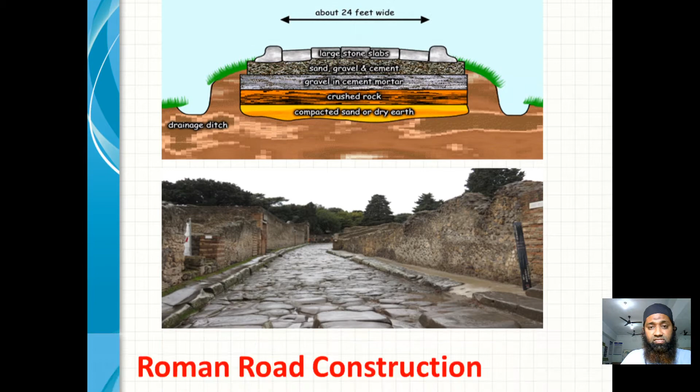The first point, you can see at the bottom of the trench, the Romans put a big layer of stones. The Romans were very good in development, so what made them develop so fast? What was the reason behind their development? You can see here how much importance they gave to their roads. At the bottom of the trench, the Romans put big layers of stones.

This is the subgrade soil where these stones have been placed, and then the broken stones, pebbles, cement and sand are placed there to fill up the voids which have been formed because of the big stones. You can see some spaces have been formed, and those spaces can be filled by these broken stones.

After the second layer has been placed, you can see the third layer, cement mixed with broken tiles. Basically, after the big stones, then the smaller stones, and after that cement is mixed with broken tiles, so even those voids can be filled up. And then you can see the paving stones found at the surface of the roads. After the voids have been filled, the last layer, the surface of the road, has been placed.

So basically, why we want to avoid the gaps or voids is, if we don't fill these voids, at later stages when there is huge traffic, because of the loads of the vehicles passing on these roads, there are high chances of big deterioration of the road. This takes place because of bad filling of the bottom layers of the roads. If they have not been placed properly, this might happen in the future.

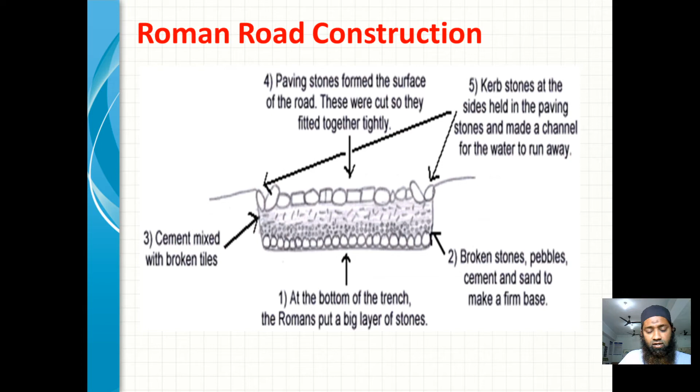Then you can see the fifth point here, the curb stones at the sides hold in the paving stones. Basically, these curbs are placed so that the passenger doesn't deviate. Even if the passenger moves away from the path and comes to the corner, he shouldn't slide down. So these curbs act as a barrier so that the commuter doesn't slide downwards. So these are placed at the corner.

Next, let us look at the ancient Greek roads, how they were placed. As you can see, huge stones are being placed, and within those stones you can see the mud lying there. So basically, mortar was placed so that these stones shouldn't move.

When vehicles move over them, they shouldn't move away, because they might result in problems to the passengers and the vehicle as well. So a number of layers are placed, and then the huge stones.

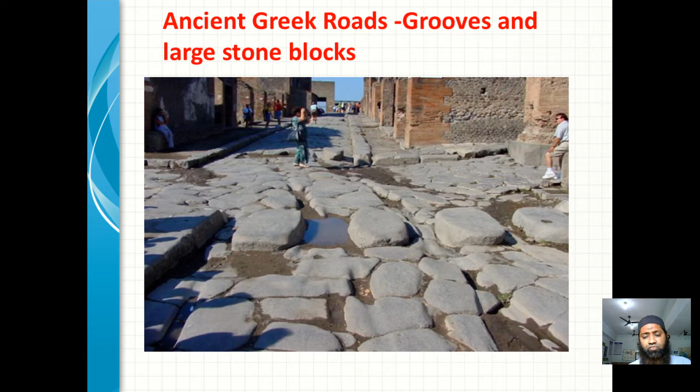See, a very big, important factor in placing a road is also what resources are available with you. You might think, why have they not placed bitumen? One thing might be that it was not available at their place, and the next thing might be they had not researched it, or they had not got that idea, because many things have been coming up with time, with the resources and with the research taking place.

Let us see what has happened in the plank road. You might be surprised, plank roads were also placed during those times. You can see the plank roads were typically constructed of wood planks, 2 inches thick. They were so thick, 2 inches thick. You can just imagine, and 8 feet long, which were nailed to the 4-inch square stringers, basically at a 90-degree angle.

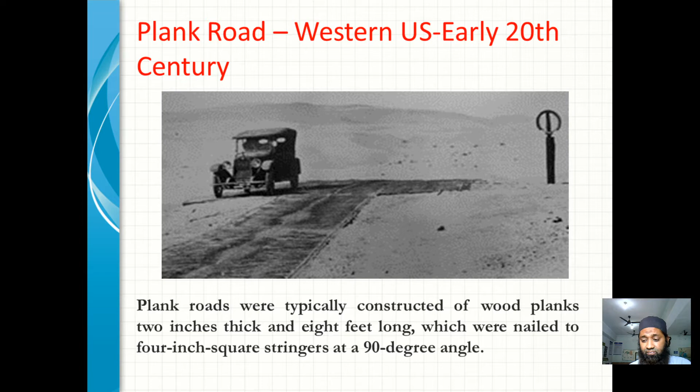Stringers are a material placed at the corners of the road, so that these planks can hold on to them. They can fix onto them, and then they are fixed directly onto the ground. These were placed in the early 20th century, Western US. Okay, you can see all these different types of roads which were laid during those times with the available materials in their place. But still, a high importance was given to the roads.

Let's see the development of roads in India. Roads in ancient India: the excavations of Mohenjo-daro and the Harappa Valley have shown us the existence of roads 2500 to 3000 years BC. So roads existed, and at that time also you can see the earthen roads which were being placed, that far back.

And Kautilya, the first Prime Minister of Chandragupta Maurya, had laid down rules in the Artha Shastra. You can just imagine that this is their scripture, and in their scripture, rules of roads, the type of road, the different types of layers to be placed, the density of the road, all this has been mentioned in their books. So just imagine how much importance they gave to road development at those times as well.

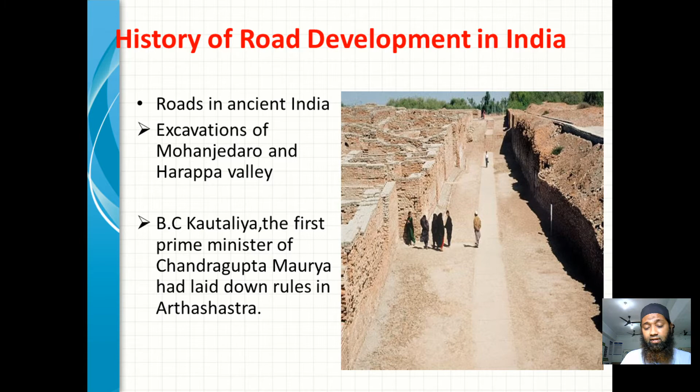Because a good road network plays a very big role in the development of the country. If your road network is good, from the ports and coastal areas to the business centers, from the business centers to the ports, and connecting the whole country, if mobility is very easy, then the defense system will also be very strong in that country. Okay, let's see the next.

Now, what happened during the Mughal period? The Mughals also came up with very big connecting roads from the northwest to the eastern areas of the Gangetic Plains. As you can see there, the road network, the Grand Trunk Road, which was placed in northern India in 1857, from Peshawar to Bombay, and then to Kolkata. Basically, before independence, India and Pakistan were together. So the Mughals placed such good roads, connecting from Peshawar to Bombay.

Now, why Bombay? Because these were port areas. Bombay as well as Calcutta were port areas. So big trunk roads were placed during that time, because, as I told you earlier, good connectivity leads to economic development, and it even boosts a good defense system.

Now, in the 19th century, when the Britishers invaded here, some of the trunk roads were already placed. The Britishers came up with new trunk roads as well. Many trunk roads were metalled and bridges were provided where the needs were there. In 1865, Lord Dalhousie formed the Public Works Department, a specific department to look into matters related to roads.

But still, due to different developments taking place at that time because of the independence movement, the roads built by the Mughals were not given that importance due to all these hardships, and the maintenance was not proper, and because of that the roads deteriorated during the British time.

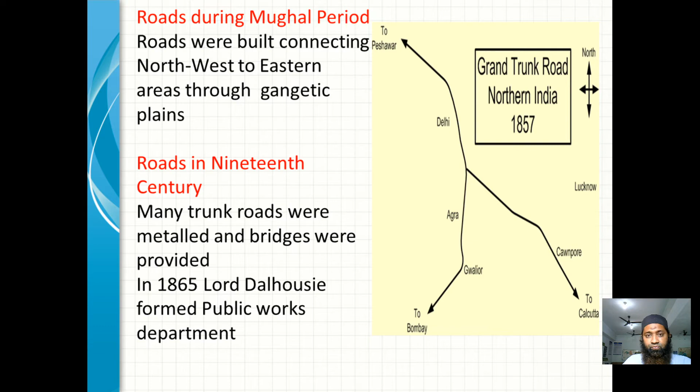Next, you can see the scenario of the Indian roads. India has a large road network of over 3.314 million kilometers of roadways. This is a very big road network. As you can see, it is the third largest road network in the world.

So, from the ancient times as well, India has been focused on improving the road network. We have been focusing on improving the road network because we know as a whole country we have good resources at different places. So we can connect from one place to other with a good road network only. It is the third largest road network in the world.

As you can see, at 0.66 kilometers of highway per square kilometer of land, the density of India's highway network is higher than that of the United States. You can just imagine, the density of the road network of India is higher than the United States and far higher than that of China as well as Brazil. China is only 0.16, and Brazil is only 0.20.

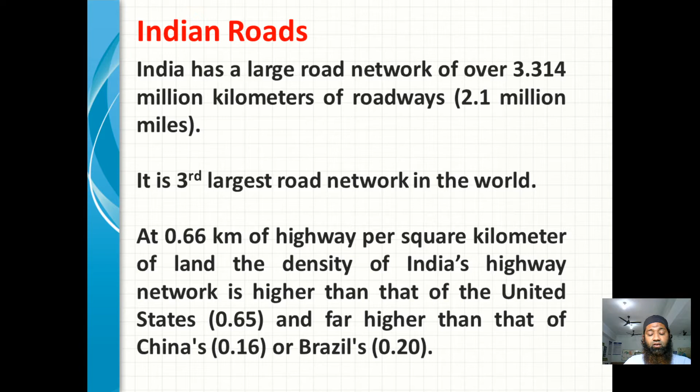So we have a greater density of highway network. We have been focusing on this from before independence as well. As you can see, in 1927, the M.R. Jayakar committee was formed, with Mr. Jayakar as the chairman, to examine and report on road development, so that road development could be given good importance for improvement.

And then in 1928, the Jayakar committee submitted its report with important recommendations. These recommendations were taken up and implemented with time. Subsequently, they were implemented because a very good report was submitted.

And then in 1929, the Central Road Fund was formed to generate funds from consumers for road development. After World War I, the vehicle operations had increased, and the number of consumers had increased. So for the Central Road Fund, a small amount of money was taken from the consumers for development of the road.

When the consumers were spending money for the fuel and everything, a small amount was taken from them for road development. Then in 1934, the Indian Roads Congress was formed to look into the matters related to planning, construction and maintenance of roads, and they recommended standard specifications.

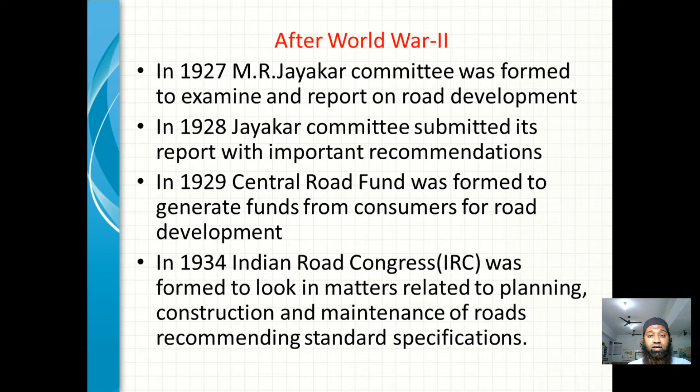So the Indian Roads Congress was formed specifically to look into the matters related to planning, construction and maintenance, and maintaining standard specifications. It was seen that because good specifications were not maintained, within a short span of time roads were deteriorating and were not giving the desired results.

Next you can see, in 1939 the Motor Vehicle Act was passed to regulate road traffic. As road traffic was increasing day by day, this Act was formed so that consumers could have themselves registered with the authorities, and traffic could be diverted to the desired places. Because if road traffic increases and the roads at those places are not proper, the maintenance cost might increase.

Then in 1943, the Nagpur Road Conference was the first road development program for the country as a whole. In this conference they came up with different recommendations for the development of the road system in the whole country. And a 20-year road development plan was finalized, from 1943 to 1963, to be completed in phases.

Very big, they came up with a very big plan, and in this 20-year plan, each plan was again separated into different stages of 5 years, and every 5 years the development was seen. The best part of this road development plan was that the desired results were achieved 2 years in advance. Whatever their plan was, whatever their focus was, it was achieved 2 years in advance.

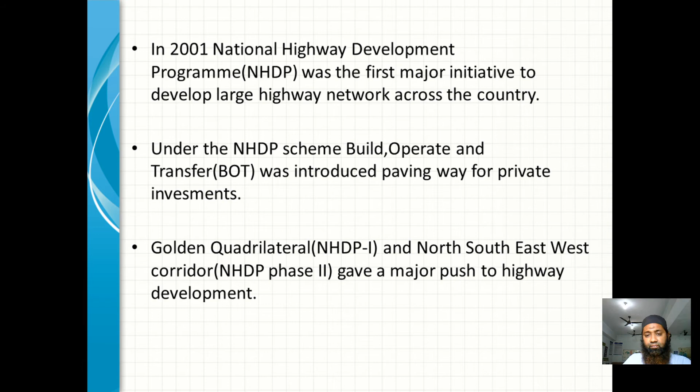So basically the whole country should be connected so that whatever resources are available in one state, they can be transported to the other part of the country as well easily. You can see here 4 other top 10 metropolitan cities after these 4, Bangalore, Pune, Ahmedabad and Surat, were also served by the network. So though the big cities were connected, Delhi, Mumbai, Chennai and Kolkata, whatever came in between them was also connected, so that transportation can be made easily.

You can see the largest highway project in India was initiated, that was NHDP, as I had told you, National Highway Development Project. It consists of building 5,846 kilometers of 4 and 6 lane express highways. Under this scheme, what came up was increasing 2 lanes to 4 lanes and 4 lanes to 6 lanes as per the need. As you can see, the cost of this project was 60,000 crores.

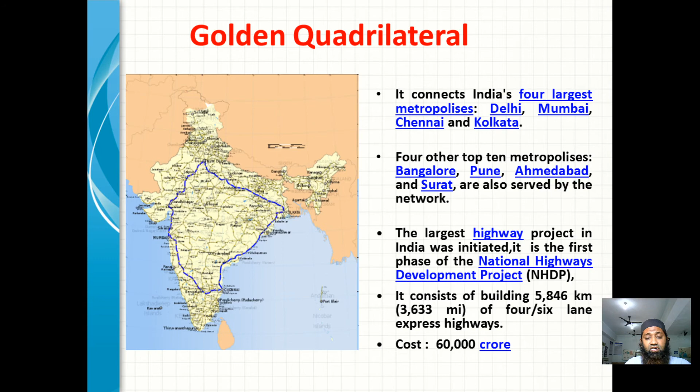After this investment it took a long time, and some of the projects are still going on now as well. But still the 60,000 crores of expense increased the GDP of our country to a very good extent. You can see here, under the National Highway Development Program the maintenance of highways of 41,290 kilometers was carried out.

As you can see, in phase 1 what was done was Golden Quadrilateral and port connectivity. Golden Quadrilateral is north, south, east, west connectivity, and they were connected to the ports. So whatever goods were coming from the port side could be transported to the different states in the country. In phase 2, the north-south, east-west corridor was connected, so that inside the country also the connectivity is good and everything can be transported easily.

In phase 3, you can see conversion of highways from 2 to 4 or 6 lanes. As I told you, in the third phase, whatever highways were 2 lane or 4 lane, as per the need and the traffic volume, were increased from 2 to 4 and 4 to 6. And in phase 4, you can see upgradation of national highways to 2 lane with paved shoulders.

It was seen that the accident ratio was very high on the national highways. The reason behind it was that paved shoulders were not provided at the edges of the road. So this was needed. So in phase 4, they decided the national highways should be improved with paved shoulders, and this was done in phase 4.

And in phase 5, extension of 4 lane to 6 lane of about 6,500 kilometers. As the connectivity between the states should be good, the 4 lane roads were extended to 6 lane, because whatever available resources had to be moved from one place to another. So 6,500 kilometers of 4 lane to 6 lane was improved.

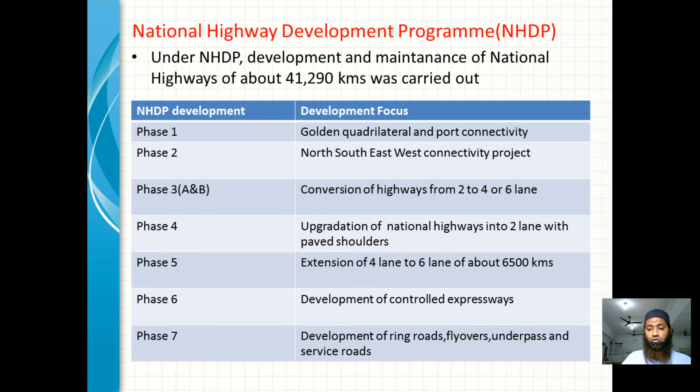So even in phase 7, they came up with the development of ring roads, flyovers and service roads also. Then later on, the Prime Minister Gramin Sadak Yojana was also formed, and this project was floated to provide road connectivity to rural areas.

Now you can see everything was being done for urban areas, a good road network was being placed, and between the states also good road networks were being placed. But the need arose for good connectivity to rural areas also, because the agriculture sector was more connected to rural areas. So a good road network plays a very important role in bringing all the output from those agriculture areas to the urban areas.

So what this Prime Minister Gramin Sadak Yojana did was give the panchayats additional funds, and progress is directly monitored by the central government. Additional funds were given by the central government directly to the panchayat, and it was being monitored by the central government, so that road development in rural areas could be given a boost.

Now what happens because of a good transportation network? The transportation network plays a very important role in developing the country, especially economic development. I'll give you one example of what China has come up with.

China has come up with a very big project called One Belt, One Road, connecting almost 68 countries. Just imagine, they are connecting Asia, Africa and Europe. From China, they are coming up with a road system that can connect three continents, and 68 countries are involved in that. The report says this started in 2013 and is expected to complete by 2049.